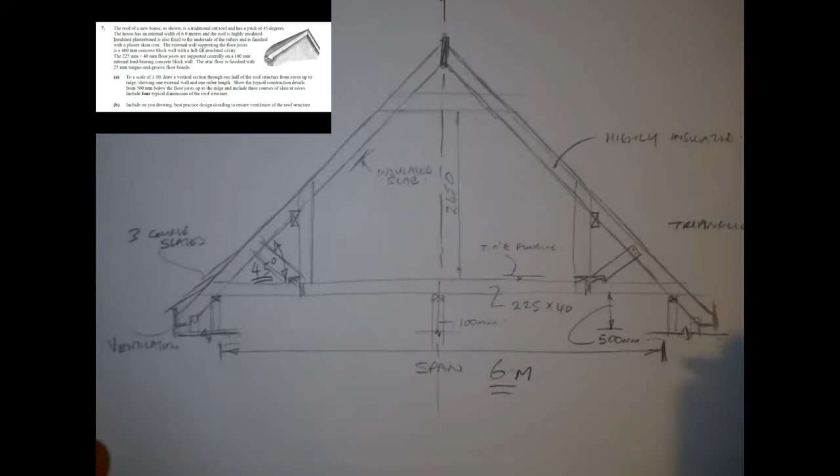In this video I'm going to look at dormer roof construction, and as an example I'm going to use question 7 from the higher level in 2015 for going about drawing dormer roof construction. In the question there's loads of clues about what you must do here: 45-degree pitch, span, highly insulated. All these are in the question, so there'll be insulated slabs. There's an internal load-bearing wall.

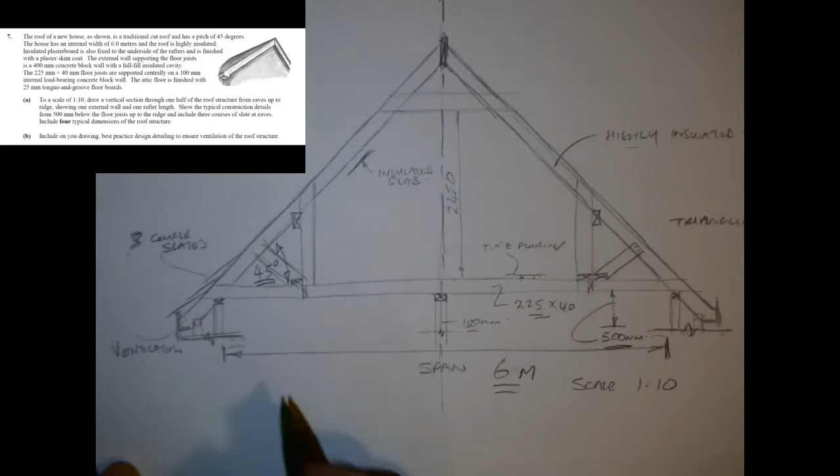It gives us a size for the ceiling joist, tells us that there's tongue and groove flooring, it tells us the scale, and there's ventilation, and we'd only have to draw half of the roof space and 500 millimeters from the bottom of the joist. And part B of the question looks at ventilation, and there's 3 courses of slates. So there's the specifics of the question.

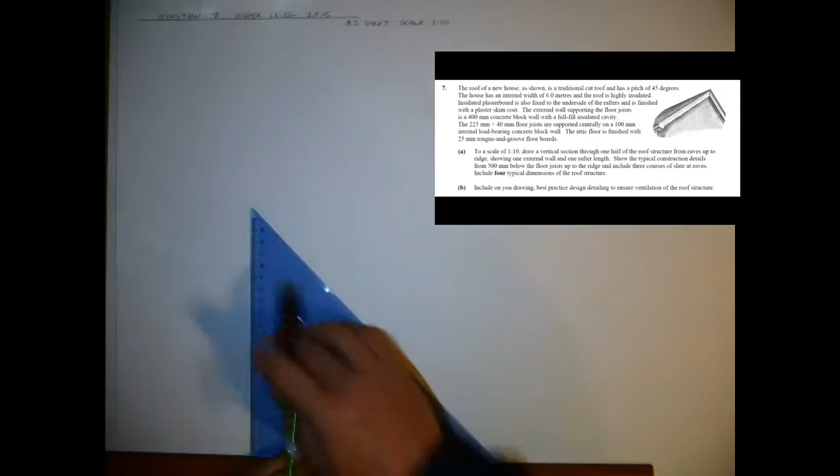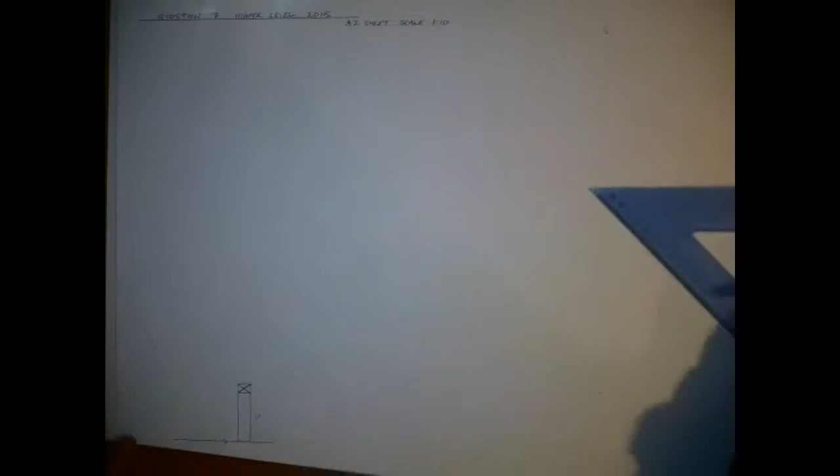I'm going to start by drawing the wall, the 400 millimeter wall, and I'm going to draw the wall plate, and then I'm going to measure across for my span using the ceiling joist. The height from the line at the bottom to the top of the wall plate is 500, which is 50 in the scale of 1:10, and I'm using a center line here to get the middle of the roof. And if it's a 6 meter span, it's a 3 meter half span, so that's the sizes I'm going by.

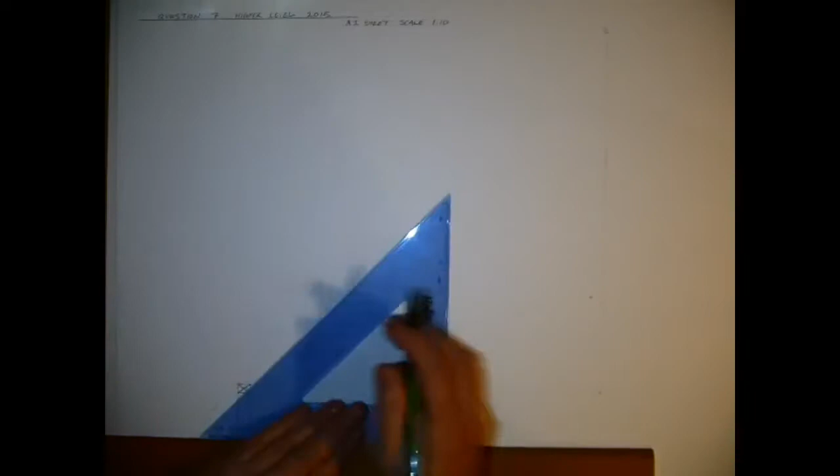It's a 45-degree pitch, which is in the question, and it's bird's mouth and a traditional cut roof, so it has to be 1/3. The 1/3 rule for the rafter, 150 millimeter rafter, so the perpendicular is 50 millimeters of a bird's mouth.

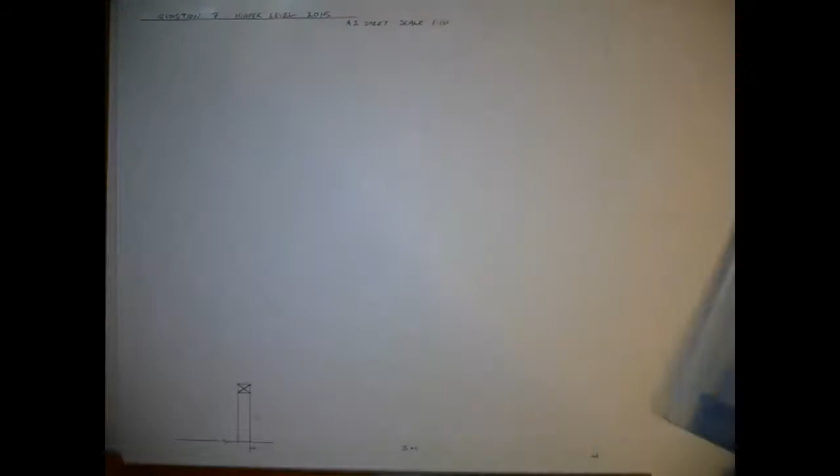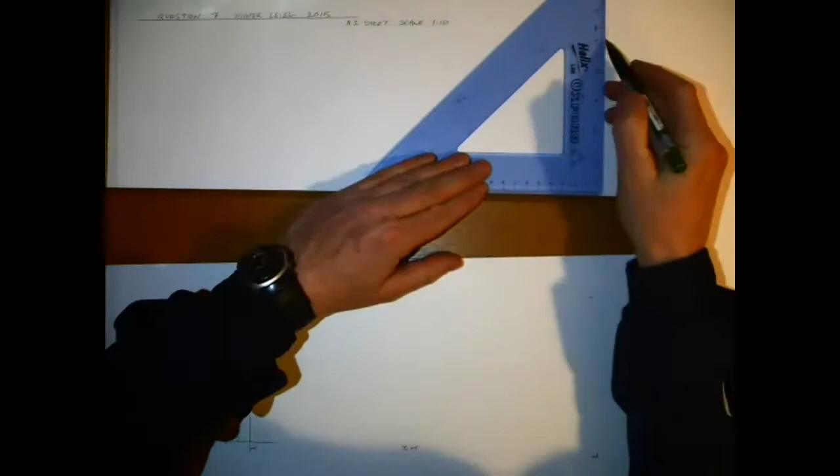Now this is drawn on an A2 page. It can't be drawn on an A3 page. It's quite a big scale, and it takes a bit of getting around. It's difficult enough to get used to drawing on that size of page. It's something that you should practice, because it comes up every so often that there's a fairly big drawing to do using the A2 page.

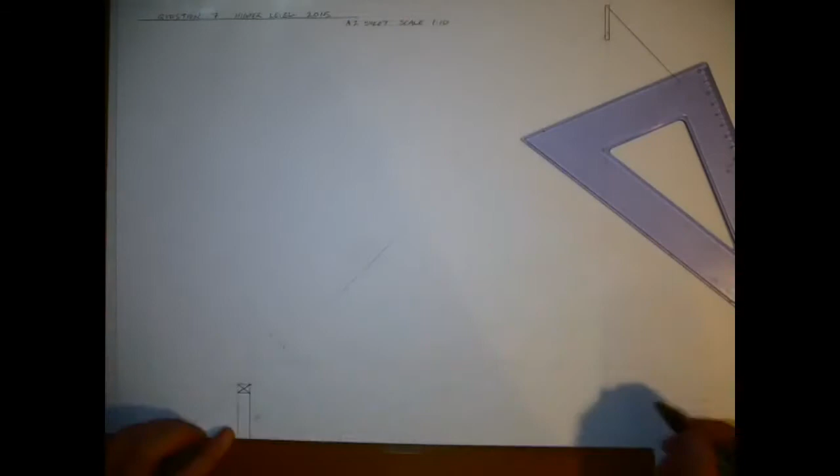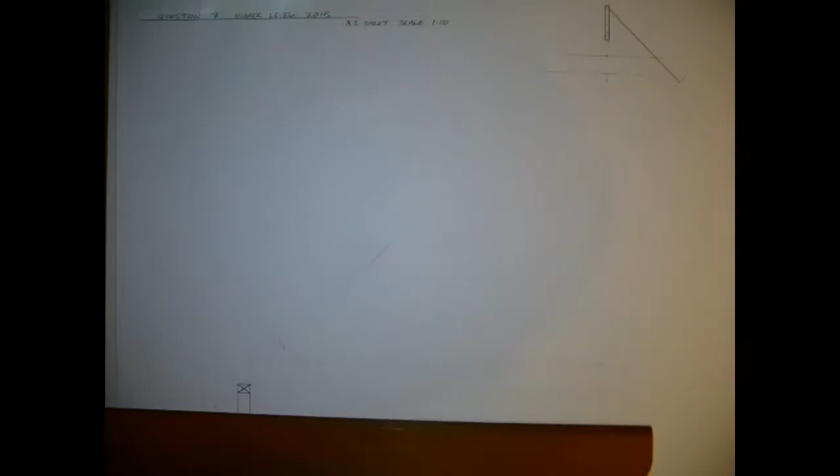So I've got up as far as the ridge board here, and I'm just going to draw a little bit of a section of the roof coming down the other side, because I'll have to put a collar tie in the attic space as well, that you would have seen from the sketch. The height that I'm looking for off the top of the ceiling joist is 2.4 meters, and to allow for highly insulated inside I'm allowing 62.5 millimeters in addition to that. So that's how I've managed to get the height of my collar tie.

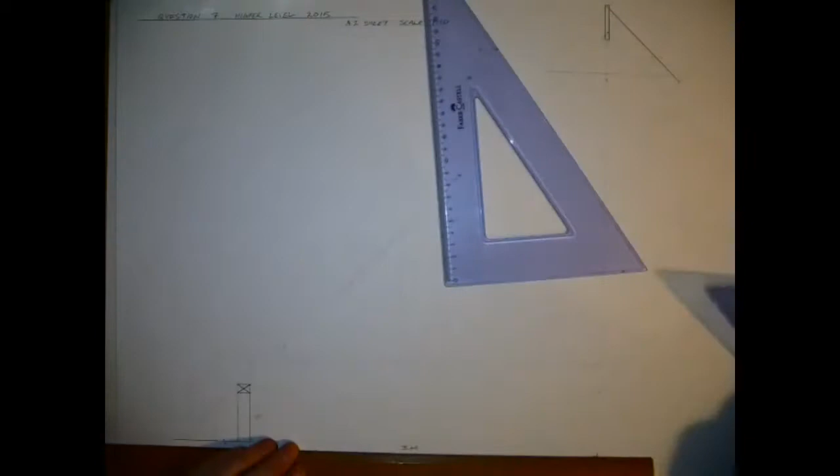And now there's quite a bit of drawing in this as well, so you're going to be tight on time to be able to do these things, but you don't actually have to get absolutely everything to be able to score full marks, which I'll explain in a little while. What I've done here though, just to keep up to speed with the drawing, is I've drawn a vertical line to show where the vertical stud would be, and I've put it in at a height of 1.2 meters.

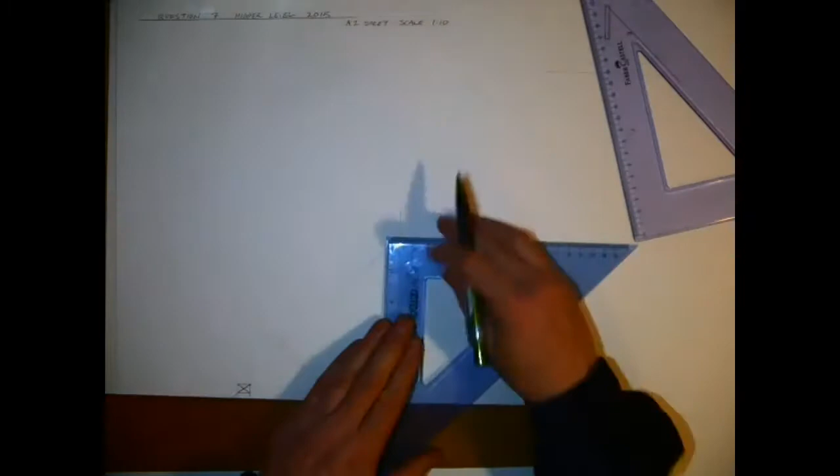And you can see down here I've drawn my soffit on the outside of the wall. It's a smaller soffit than usual, because I felt that it was a bit tight on the space in the sheet to draw this. And for every element that you're drawing in here, you must make sure that you note it. It's no good just drawing it. You must make sure that you note each of these things in order to get the marks.

I have a timber purlin shown here at the back of the stud, which will obviously be supported from a load-bearing wall internally along its length.

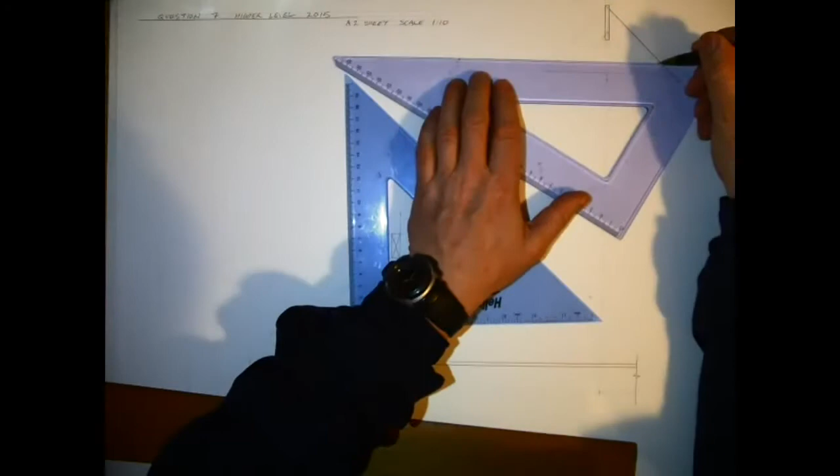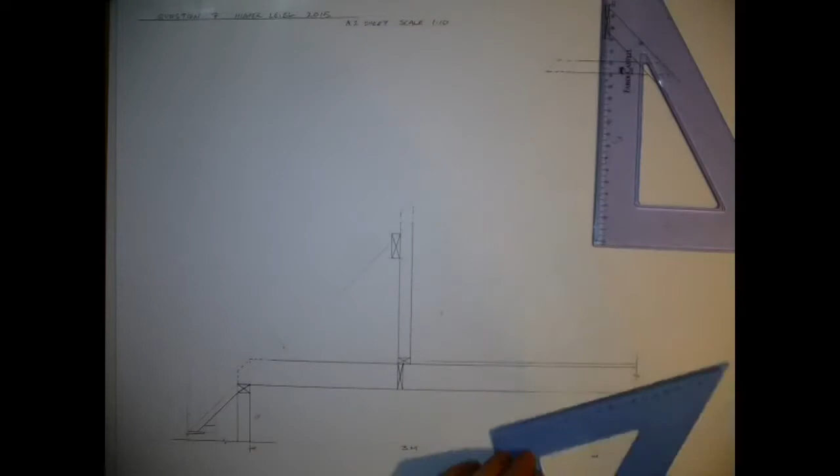And I have my collar tie up here at the top, which I'm drawing in. This would be only something like a rafter type material. I've gone for slightly smaller because there's not much space at the very top of it there when you allow for your 2.4 meters. This trimming joist, or the noggin that I'm drawing in at the bottom here, the bridging piece, is actually placed there for fireproofing reasons, and the slab is actually meant to be a half-hour fire check rated underneath it, and the part that's not used in the roof space there.

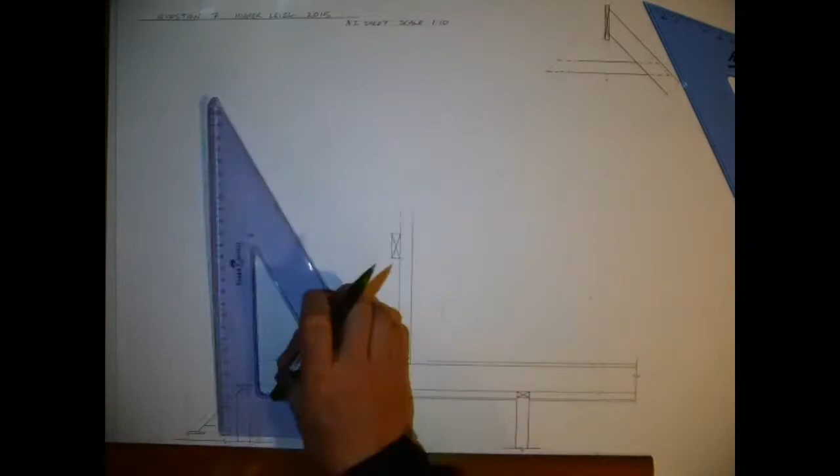Draw my internal load-bearing wall. Now if you look at the marking scheme for this particular drawing, once you label 10 items on this here, it would have scored you full marks. Normally you'd be looking somewhere between maybe 10 and 15 different elements that you want to label in your diagram. If you hit that there, you should be fairly safe in managing to get the full marks, even if you haven't completed absolutely everything in your drawing.

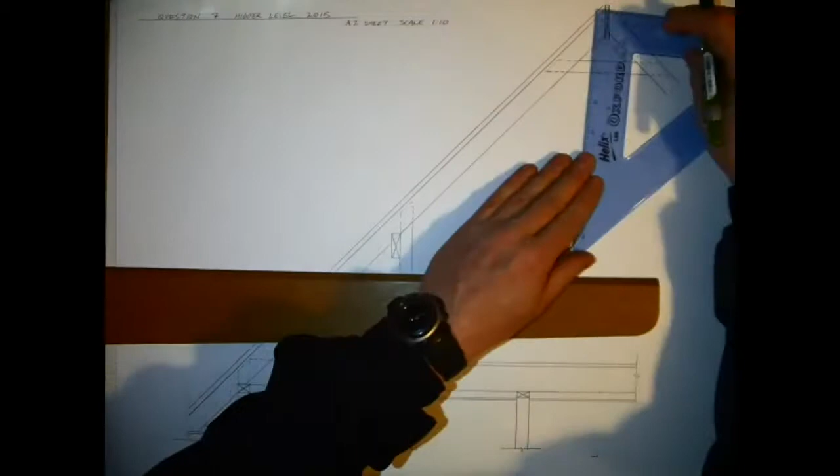And just continuing the rafter down here. So if you think about it, you draw your wall, even if you put render on the outside of the wall, they're 2 elements. The internal load-bearing wall is another element, a purlin's an element, ceiling joist is an element. It doesn't take too long to build up 10 elements in this drawing here.

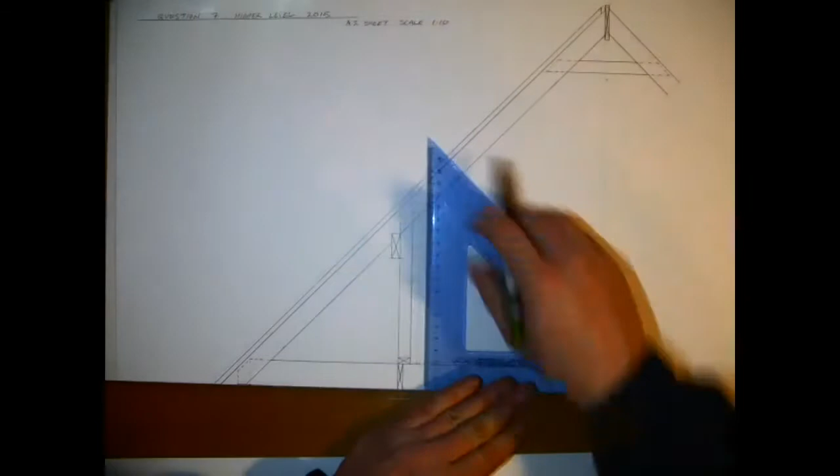I'm putting a double line there showing a Gutex board, which is for windproofing, and I didn't draw my fascia until I have that done, because I used another line which is kind of indicating the top of the laths, and I'm going around the inside of the roof space here now, and I'm allowing for the distance down of an insulated plasterboard to go around that inside there, and then I'm finishing off my tongue and groove board to come over and meet that there.

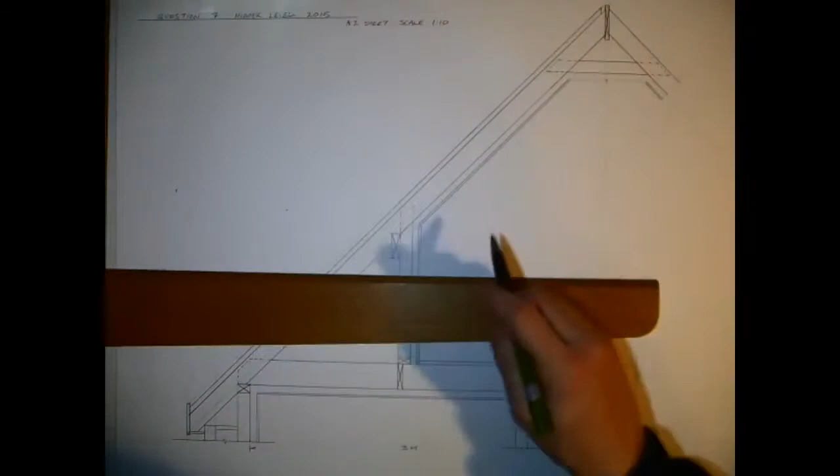And again, that was indicated in the question. Anything that's indicated in the question, you mirror this in your answer. You make sure that you include anything that's in the question in your answer.

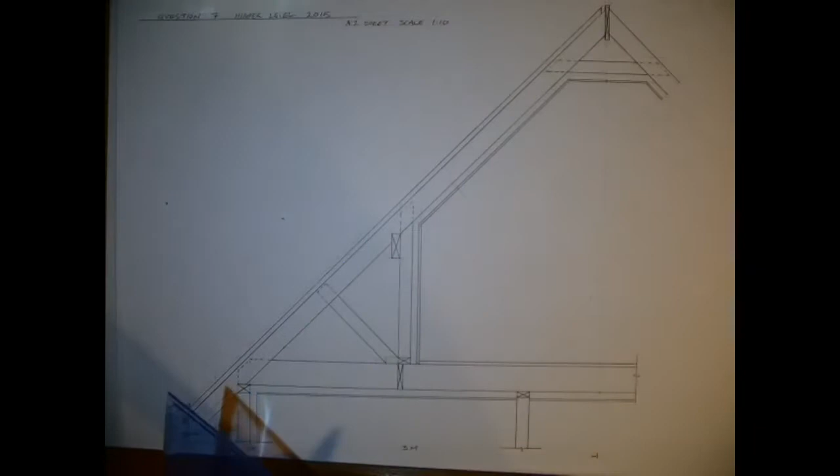So back to the drawing here, triangulation of the roof is very important. You're losing triangulation when you open up the roof space for accommodation. So I'm putting in this perpendicular strut that's coming over to meet a runner. This can be used in an alternative construction where the joist is dropped down, but in this case as well, it could be used. I'm putting in an eaves ventilator, and I'm putting in my battens. You can see my other videos that I go through to explain how to do the slating detail.

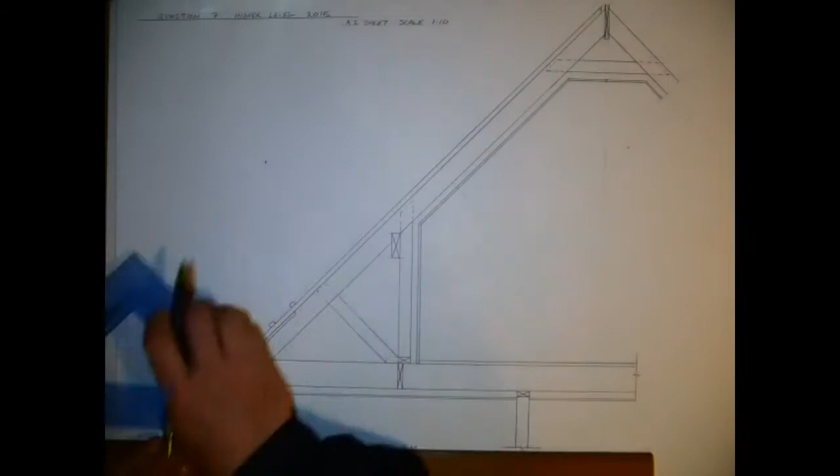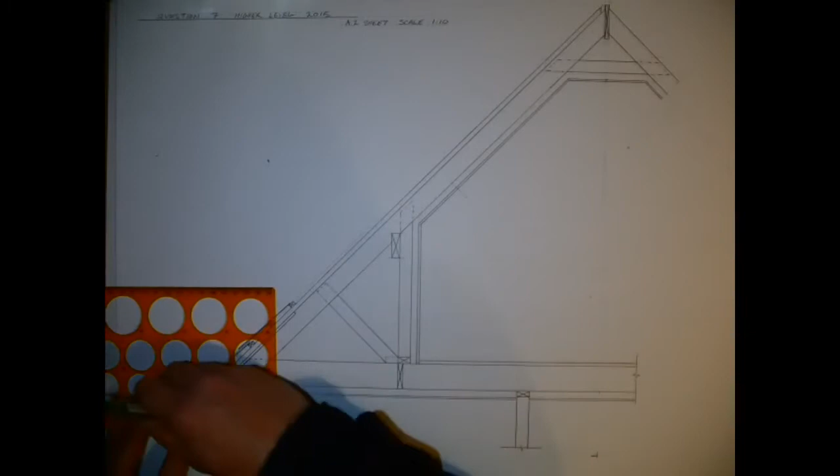So the first one is 300, the rest of them are 250, and then I have to put an additional batten in for the eaves course at the bottom, which I'm after doing here now. And that takes a bit of time now doing that there to get up to speed with this. Make sure that you have your laps, the 600mm slate that's centre nailed, making sure that it goes the distance to each of the different parts on your drawing. Once you have the overlaps on them there, that's your courses of slates shown.

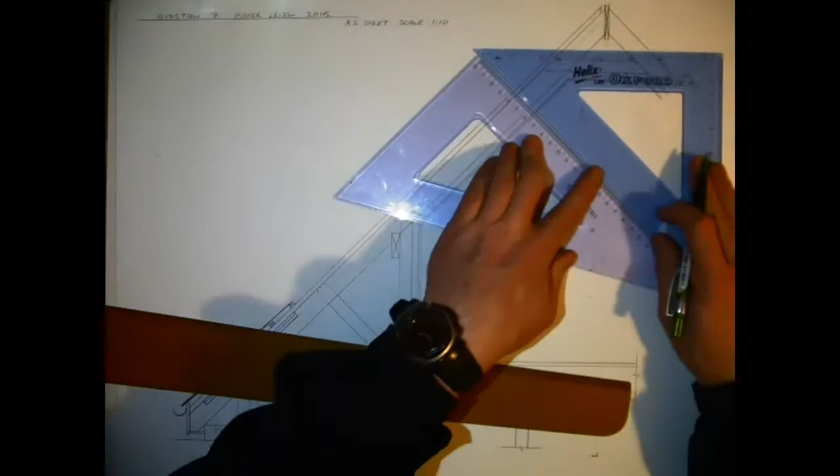The tongue and groove, I just freehand them in, showing a little bit of a tongue on the pieces of the boards. I'm giving myself a few guidelines here for insulation when I place it in. You're looking to have a minimum standard of 300mm of insulation. Not much room at the very top here where the collar tie is.

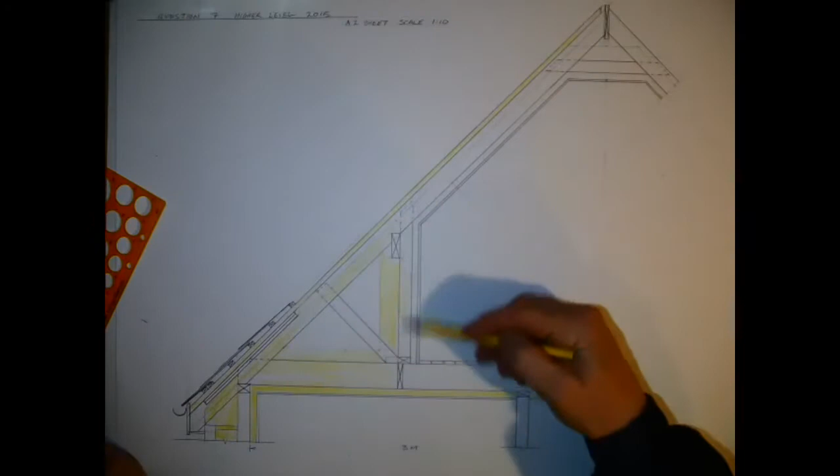And in all honesty, if that was a new build, a rough rule to go by of having accommodation space in the attic would be that the collar tie, at a height of 2.4 meters, should cover 2/3 of the floor area. If it doesn't do that there, it probably wouldn't be getting passed for accommodation space in the attic. But in this case, it's only to fulfill answering a question for an exam, so I wouldn't imagine that there's terrible thought put into that there.

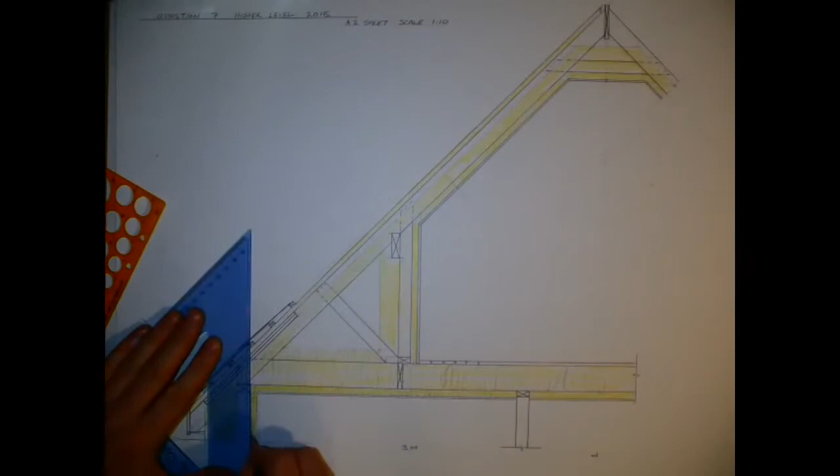Insulation shown here, I'm kind of going through some of the detail fairly quick on that. Again, in the exam, I would leave it probably at the colour, really, because you don't have a lot of time. A few pens are very good for highlighting the likes of what I'm putting in now, the air tightness membrane. And remember, the question did ask for highly insulated, and I have that there kind of covered in that.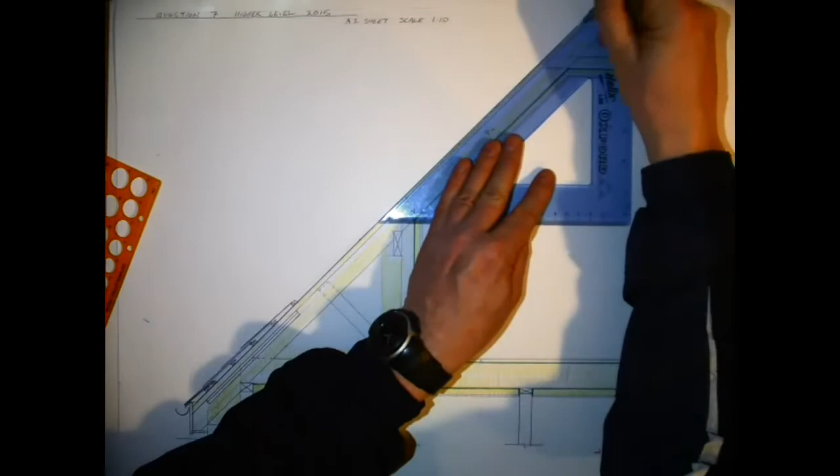And my cavity barrier down on the 400mm wall. Specifics of the question are all addressed in this here now. If I was to stop at this point and just start to stick in a few details of notes, you can see I'm answering the part B question there with the arrows going up, showing the vent at the very bottom, moving right up to the ridge, and have a space at the top at the ridge where this ridge slate will be put in, allowing for ventilation up there.

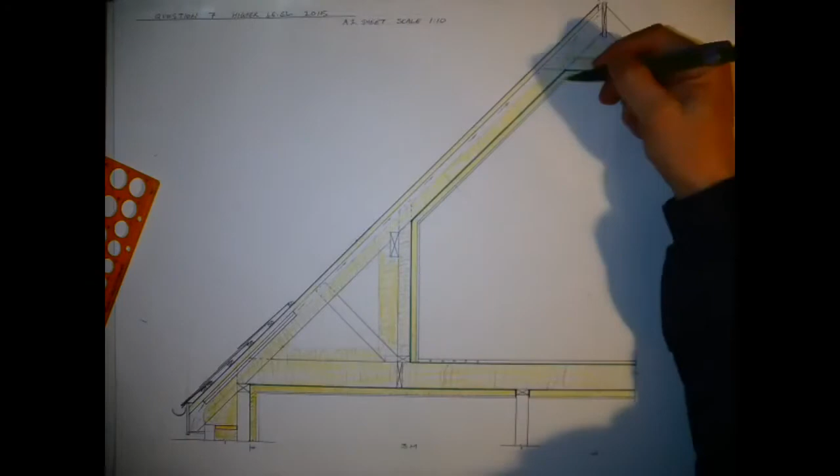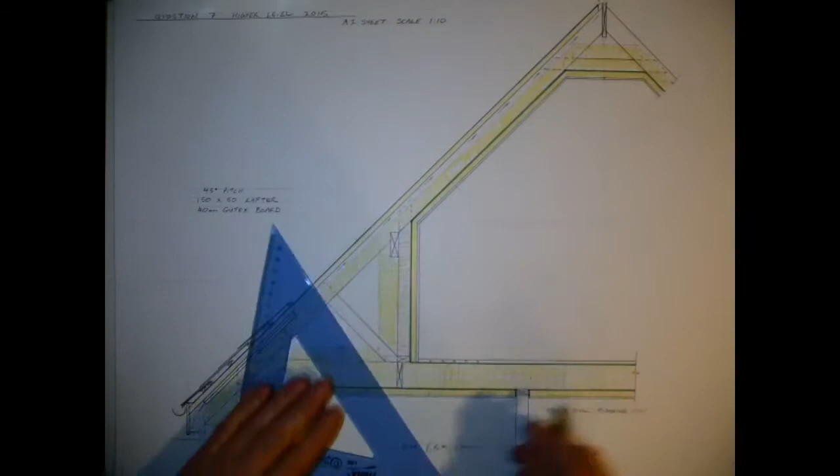And there's something that I haven't done here, which you could have put in, would be cross battening for the slates, but it's fine as it is here. You're going to be tight on time in an exam to be able to get all these details down. And at the end of the day, remember I said each of the elements that you're getting, aim for somewhere more than 10. You'd want to have maybe 14 or 15 different elements on this here.

You can see I'm indicating 500mm up. That was asked in the question. Once you address the question, you're going to be hitting each of the things that you're going to get marks for. So about maybe 10 to 15 elements. Make sure that you label them.

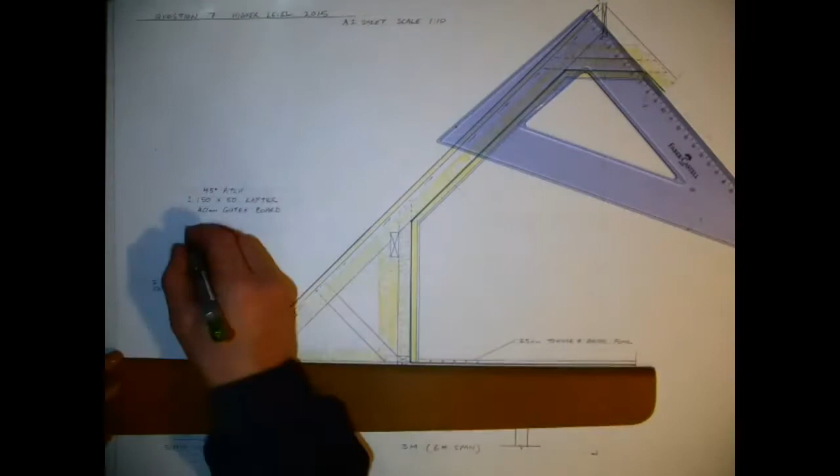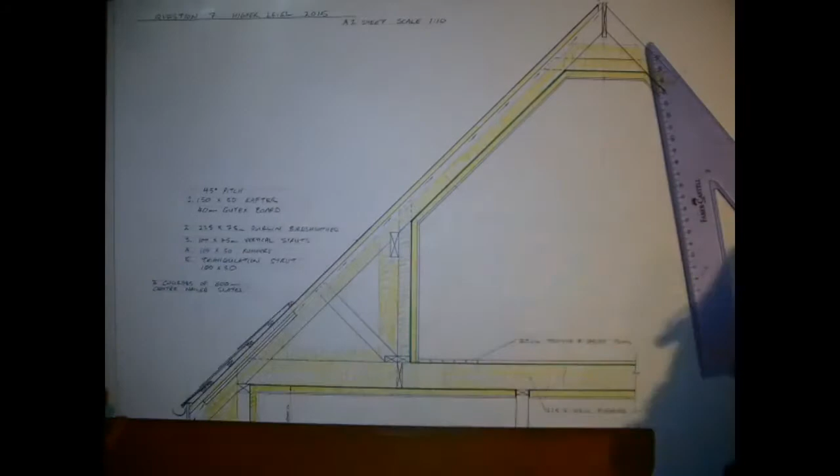The scale, there's not a huge number of marks going for the scale. Out of 60 marks, there's only 4. So it's not terribly high. The quality of drafting isn't high either. It's only 4 marks in that as well. And then the B part of the question there, I think you're looking at 8 and 8. So make sure that you address each of the parts of the question.

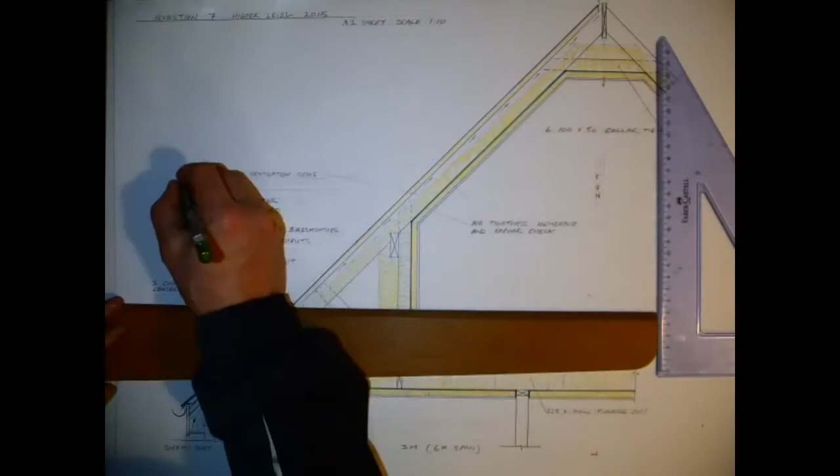Like I said, this is a big scale of a drawing. It's 1:10. It's taken in a lot of detail. Normally if you were drawing something like that, that was maybe an attic space or a full roof or the best part of a roof, you'd be going at 1:20, but at 1:10 you're doing well to fit this on the A2 page, so it takes a little bit of planning for laying out.

As you can see, it makes the full height of that A2 page, which is pretty tough on anybody drawing here. And I've got way more details than what you would actually need in there. If you were to count them up, when I'm finished, I probably have in excess of 20. Half of that would have got you full marks in the exam.

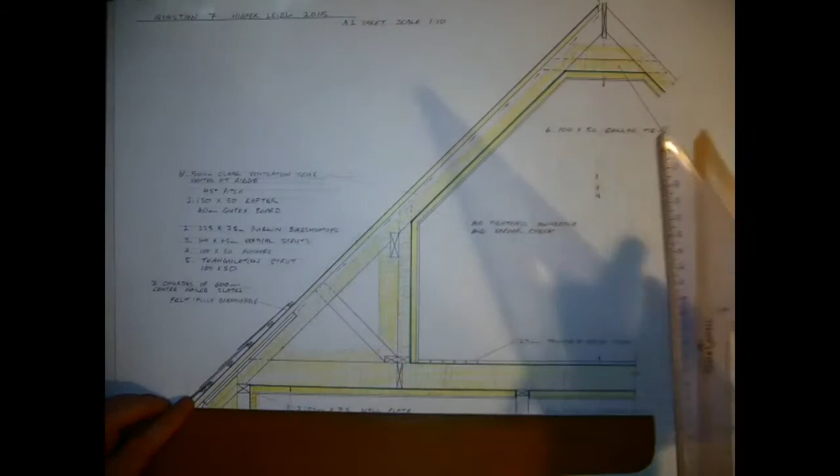And just a note, I suppose, on the load bearing wall. I didn't go to the middle with the load bearing wall because normally you might have a corridor or something like that there. It could be staggered, and that's the reason why I put that in there. The purlin, the wooden purlin that I have in here, could actually be put in as steel. And there's a few regulations on steel as well.

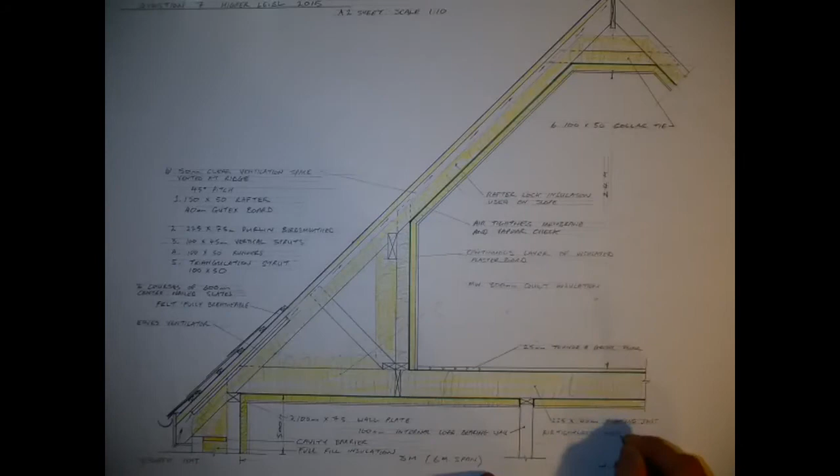If you're using steel to support the floor, you have to have it fireproofed. If it's not, you don't have to have it fireproofed. You might have to have a timber wall plate on top of the steel in order for it to be able to bird's mouth it in.

Then other things like fire escape issues with attics, you would want to have maybe light getting into the attic. If it's a skylight that's used in the attic space, it has to be top hinged in order for it to be able to escape. And there's regulations over the height it can be off the floor. It can be only 600 millimeters off the floor.

Other things then, like a gable window, would have to have regulations for fire escape as well. 500 millimeters minimum opening. The height of the sill could only be between 800 and 1100 off the ground. Things like that come into the attic, and I'll take a look at those details in another video. But this is kind of addressing the question that would have come up in 2015, and it's well worth practicing.